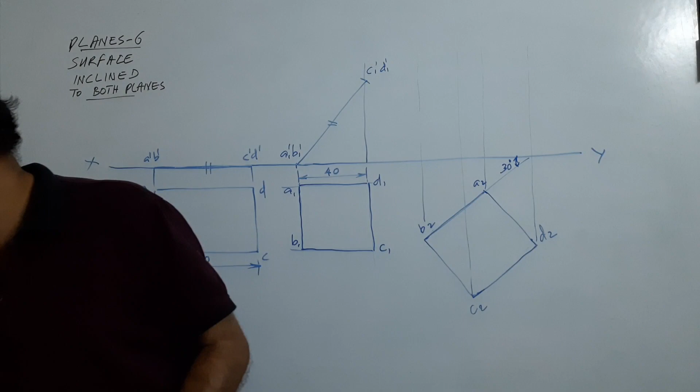It's about a rectangular lamina. Assume this is a rectangular lamina, zero thickness, assume.

The question says, a rectangular lamina of 40 mm and 60 mm sides rests on HP on a shorter side, the shorter side, in such a way that

the plan is a square. How do you make the plan of a rectangular lamina a square? By tilting it in this direction. At some point, the plan is a square. Square of what size? This side.

If this is 40, square of 40 mm side. If this is 50, square of 50 mm side. There is no other square possible. Agree? Okay. So, plan is a square of 40 mm.

So, you know what to do. Then, that is not over. The side on which it is resting has to make 30 degrees to VP. How many conditions are to be satisfied in this question?

1. The rectangular lamina should rest on the shorter side. 2. The plan must be a square. 3. The shorter side on which it is resting has to make 30 degrees to VP.

So what you do is, keep the lamina like this. Plan A, B, C, D. Elevation A dash, B dash, C dash, D dash. Elevation is a line.

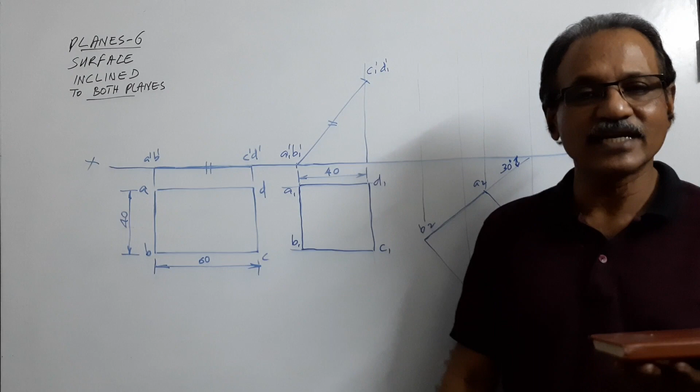Tilt it till the plan become a square. For that, what do you do? You take A1 dash, B1 dash anywhere on XY line. Why A1 dash, B1 dash is on XY line?

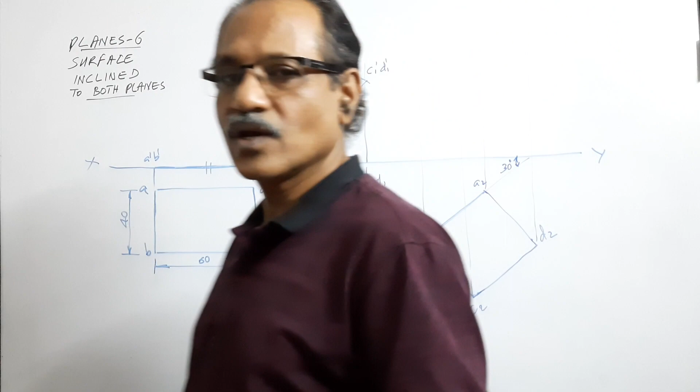The side AB is on HP, so its elevation must be on XY line. Take A1 dash, B1 dash on XY line. Measure 40 mm away. Draw a vertical projector. Onto that, cut this elevation length.

C1 dash, D1 dash. Draw vertical projectors. Draw horizontal projectors. You get A1, B1, C1, D1, which is a square. Square of 40 mm side.

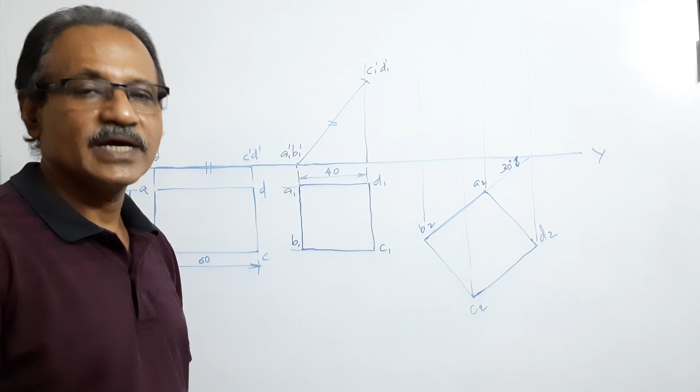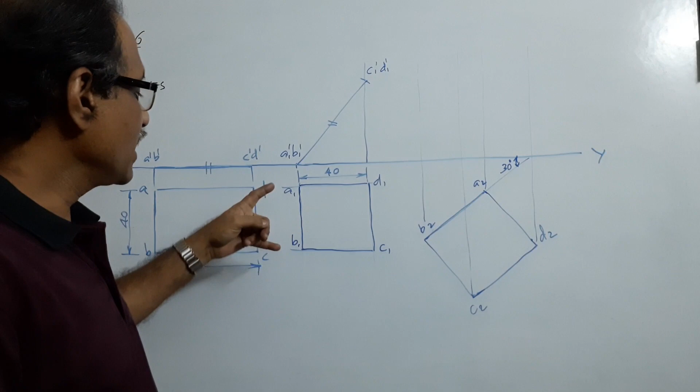Now, the side on which it is resting has to make 30 degrees to VP. Which is the side on which it is resting? A1, B1. A1 dash, B1 dash is its elevation.

Redraw this plan here in such a way that A1, B1 which you name here, which is the side on which it is resting, has to come here as A2, B2, and that should make 30 degrees to XY. So take any point on XY line, draw a 30 degree line. On that line, somewhere choose A1, B1 and mark A2, B2.

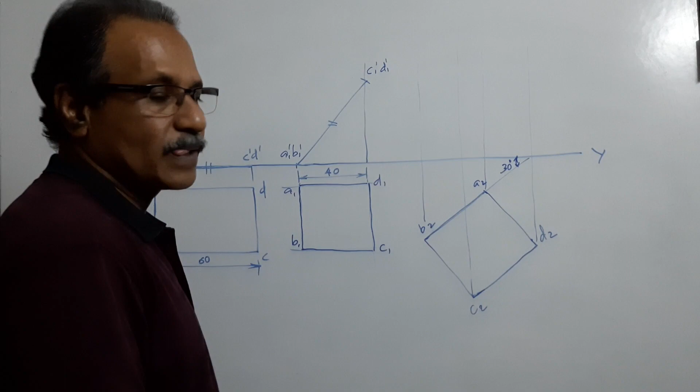Draw perpendiculars and complete the square. What is this? This is the final plan. A2, B2, C2, D2. Draw vertical projectors up and draw horizontal projectors.

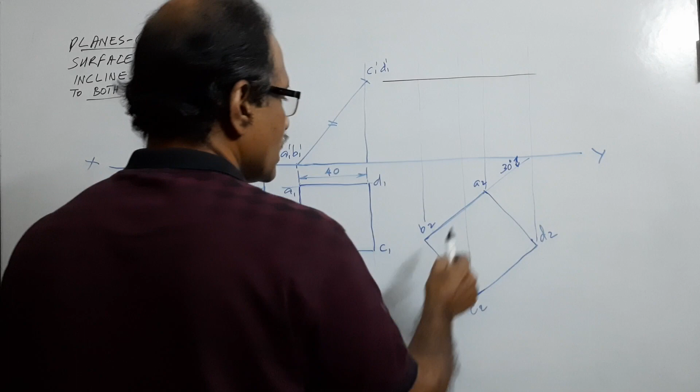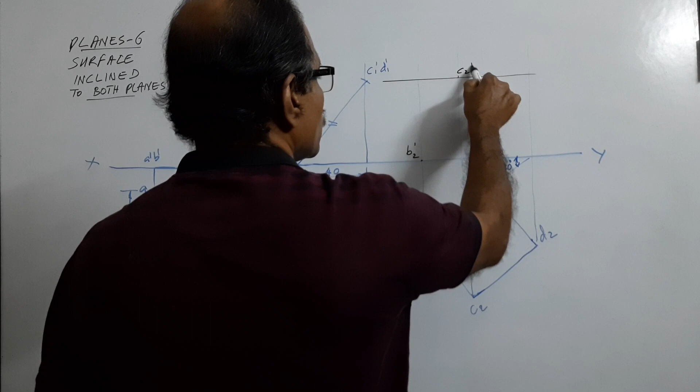Vertical line through A2 and horizontal through A1 dash meet at A2 dash. Vertical through B2 and horizontal through B1 dash meet at B2 dash. Vertical through C2 and horizontal through C1 dash meet at C2 dash. And similarly is D2 dash. Connect them.

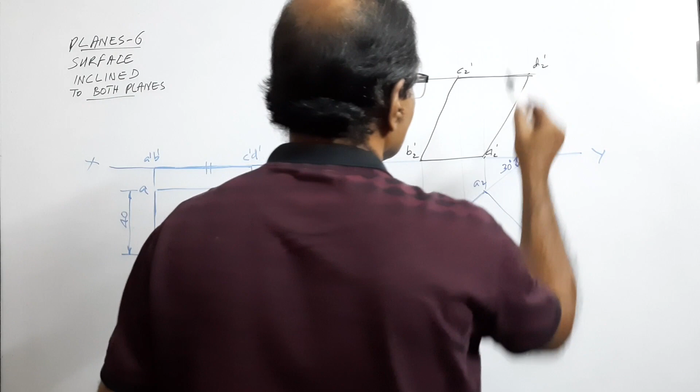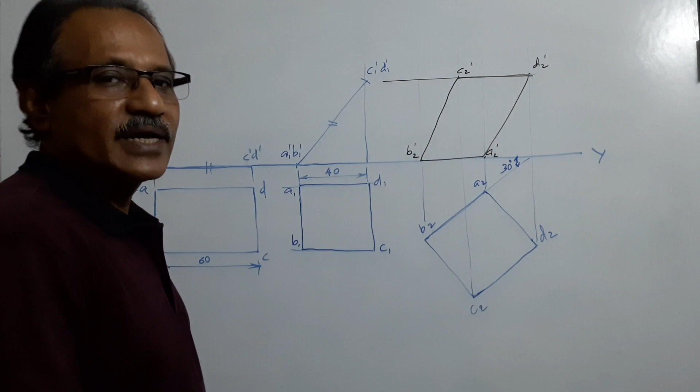This is the final plan and the final elevation of the lamina in the required position. When you draw a problem like this, you know you have to dimension it 40, 60.

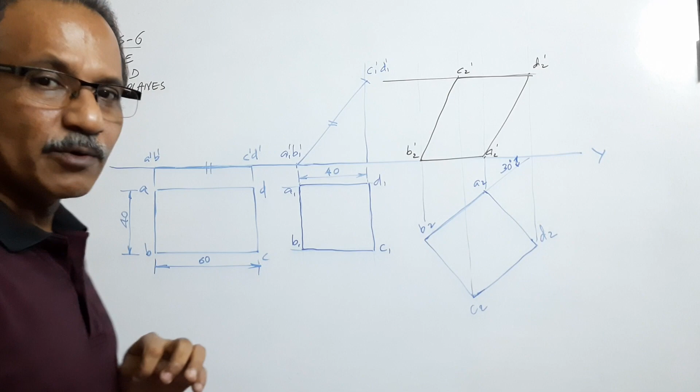I am not mentioning about dimensioning in all the problems. In this problem I am mentioning it. So it is your responsibility to mark dimensions on all problems you draw, because dimensioning, neatness and the way in which you present carry some credit.

Usually for drawing subjects, it is a usual, very old practice from old days that 70% of the mark be allotted to the correctness of the solution and the remaining 30% to be shared for neatness,

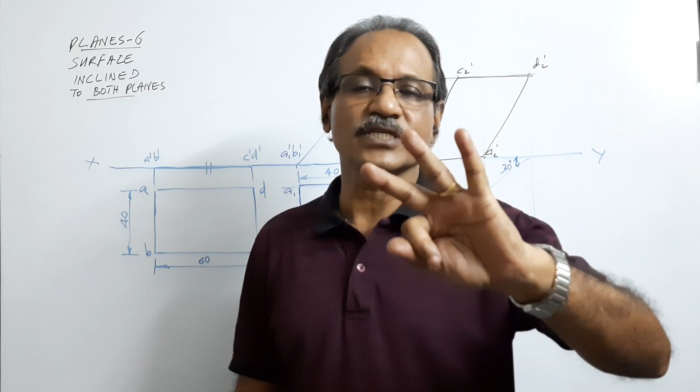dimensioning and the presentation including the scale chosen. When the object is big, sometimes we choose a smaller scale now. When the object is very small, we may draw it as a bigger size, larger scale is used. So that includes presentation. That is to be accommodated in 30% of the marks.

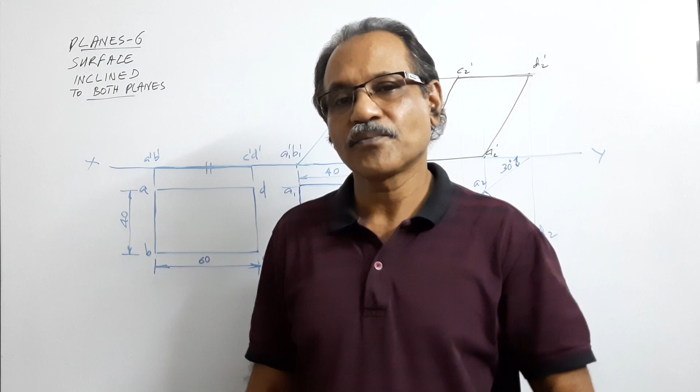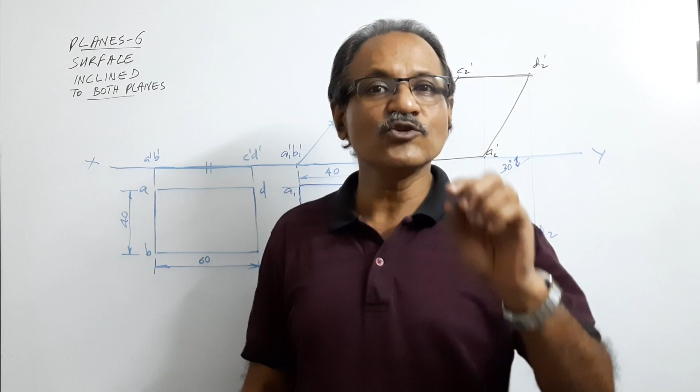Agreed? So it is extremely necessary that you present your drawing neatly and well with the dimensions and neatness and clarity. To improve neatness, you have to use only H pencil, and the arrowheads, lines, all must be equally good.

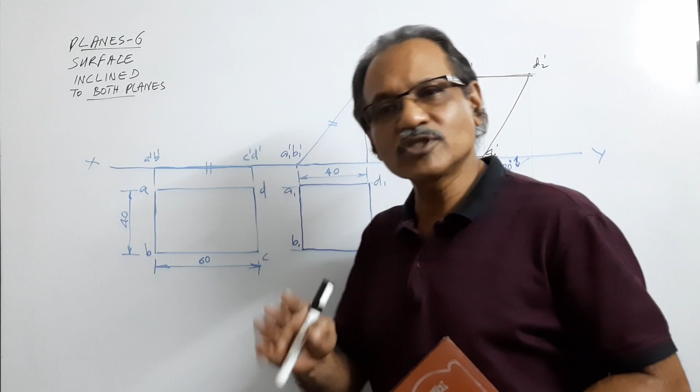All visible edges are to be equally dark. All invisible edges, here the invisible edges do not come. All projectors are to be very light, and those are some of the precautions that a student can adopt while

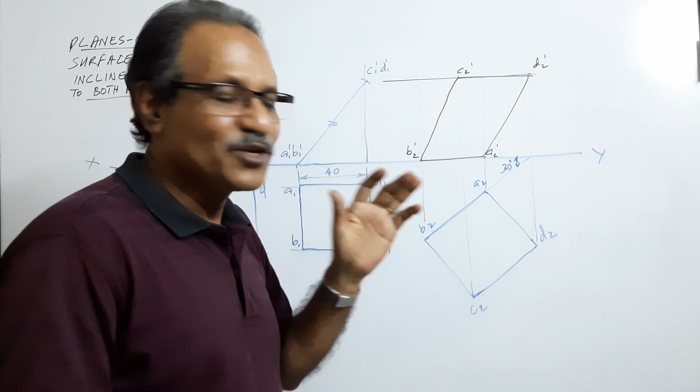preparing a drawing. So this is the final plan and this is the final elevation. It is always customary to mark the final plan and elevation as slightly darker compared to these two.

What message are you giving? This is the final result. So the final plan and elevation can be drawn slightly darker than these views.

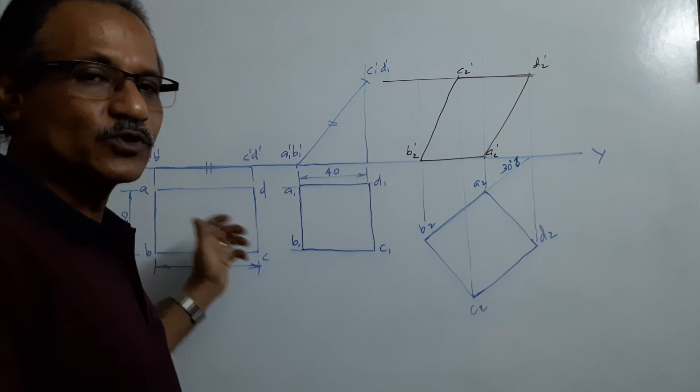I hope you understand. This is a very simple question. This has come several times in university examinations. I hope you understand. Okay then. Thank you.